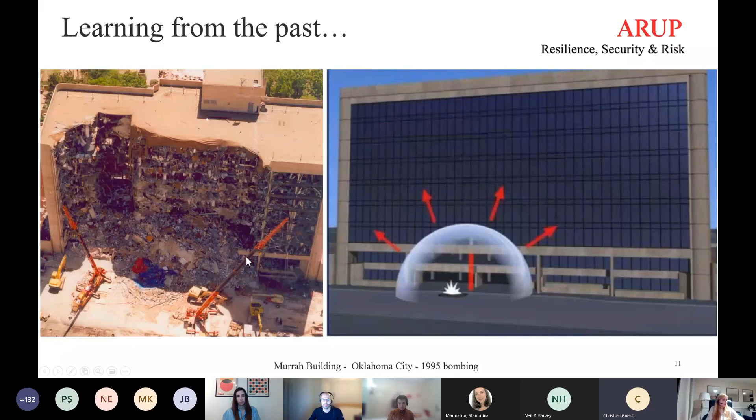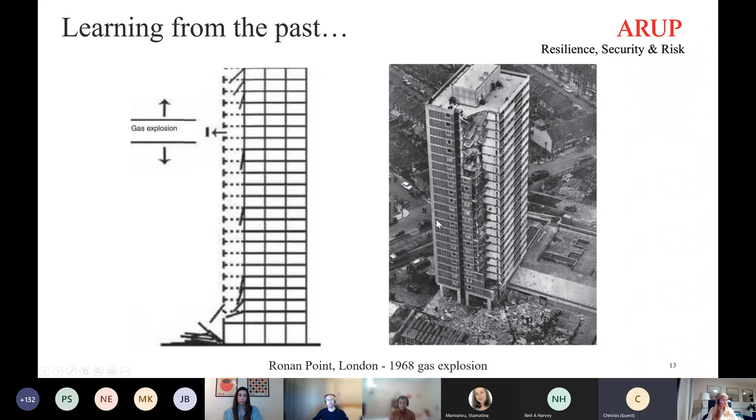Talking more about the present, there are levels of threat in the UK. Precisely, we have 5 levels: low, moderate, substantial, severe, and critical. This data is public, so you can find it on gov.uk. At the moment, substantial is the level the UK has, which means an attack is likely.

Another thing to note is that in the examples I've shown so far, I've just shown detonation of bombs apart from the aircraft impact. But in reality there are different types of threats. To mention another one, vehicle as a weapon has become very popular, more frequent. Eirini, my colleague, will discuss more about this specific type of threat and the possible mitigation options we can use to reduce this risk.

Coming back to the original question, why do we need protected design against terrorist threat? Definitely because of what we learned from the past, as I've shown you. But also because it can bring commercial advantages, since people couldn't come back to operations straight away after these events. And because it's perceived as the responsible thing to do, as we want to protect people and protect business. Finally, because it might protect against potential litigation.

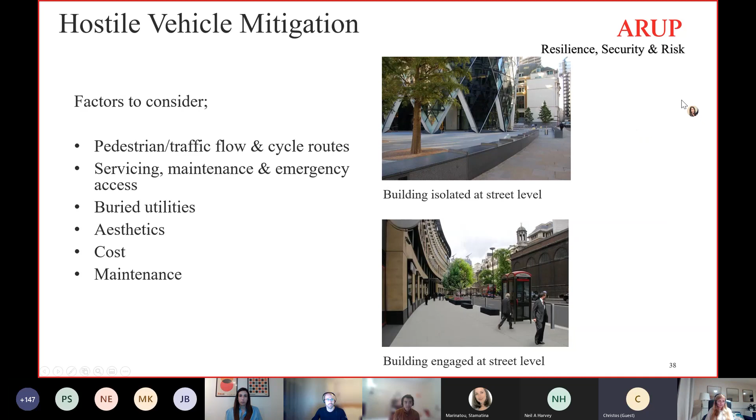Okay, so in this example, vehicle weapon attack was identified as a credible threat. However, due to some restrictions that we had from the highway authority and the landlord, it was not possible to install measures on the pavement along one of the building elevations. So our client expressed an interest in embedding the HVM into the facade of the building.

So we designed an upstand reinforced concrete wall that is in line with the building line, so it's part of the building facade. As we're looking at a high level of protection, aiming at no penetration, minimum damage, and we're looking to achieve a specific rating based on CPNI guidance, we also conducted impact testing to ensure it complies and matches the client's requirements.

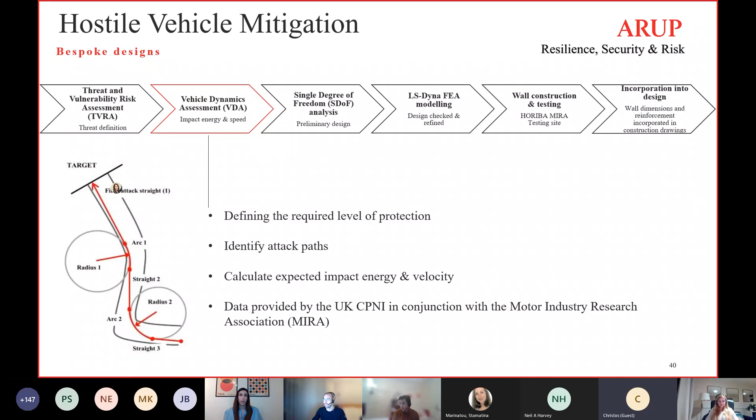So after the threat was identified, and that's a common process we follow, we undertook a vehicle dynamics assessment. What we do is identify possible attack paths like the ones you see here, and calculate the expected impact angle, speed, and impact energy for different vehicle types and trajectories. And that sets the design basis.

So during an impact, we know that the kinetic energy of the vehicle is converted into work. During a soft impact, the energy is dissipated by the structure - a vehicle hitting a bollard is a good example of that. While during hard impact, the structure is considered rigid and the energy is dissipated by the deformation of the vehicle, like in the case of a rigid wall or a planter.

In reality, it's a bit of both, but we conservatively assumed a hard impact to calculate an equivalent static impact force. Based on that force, we undertook a preliminary sizing and reinforcement design, and then moved on to evaluate its performance using a single degree of freedom dynamic analysis.

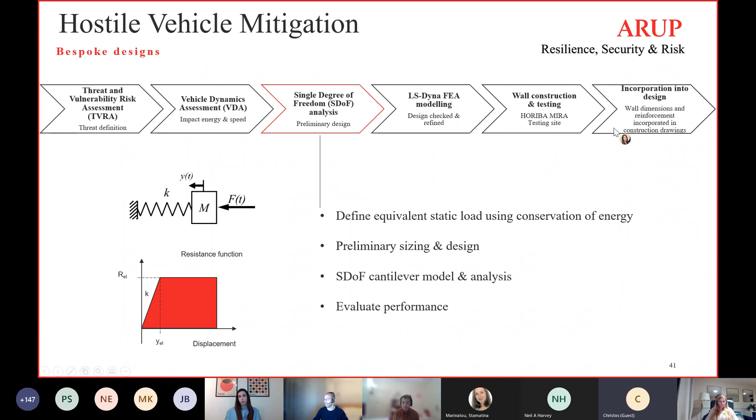Anqi will talk a bit more about single degree of freedom later, mostly about blast, but it's an efficient way of checking a design is within acceptable limits. So once we're happy with the preliminary design, we use finite elements to model the wall in LS-DYNA to check and refine the preliminary design.

So overall, the challenge here was that we had a large level difference between the ground level outside and the slab level inside, creating a large lever arm. And also the need to keep the wall as thin as possible to limit potential damage to the wall itself and not affect the existing slab.

So this step was important to provide us with confidence in the detailed design before moving on to testing. Again, here we conservatively used an impact force time history - this one you see here, recorded from a test of a vehicle impact to a rigid wall. So this is applied to the wall depending on the vehicle we have.

So a vehicle is stopped by engaging its chassis rails. So the impact force was applied to the wall at the height and area taken by the chassis rails.

As we know that this was a conservative approach, we also used a modeled vehicle to do the analysis. So we knew that the specific one was a bit less stiff than the one we were going to use during the test. So these worked as an upper and lower bound for our analysis.

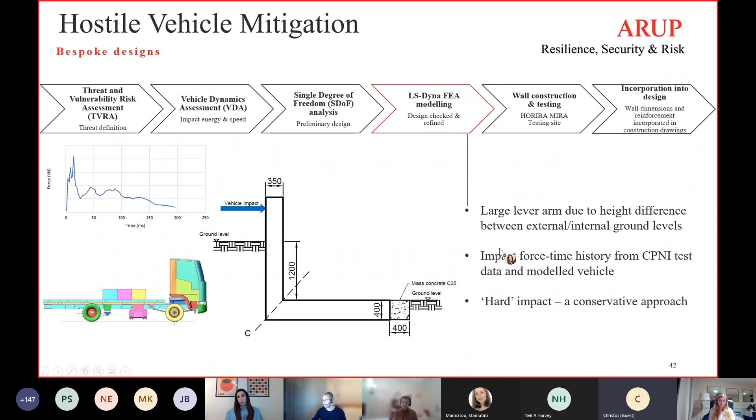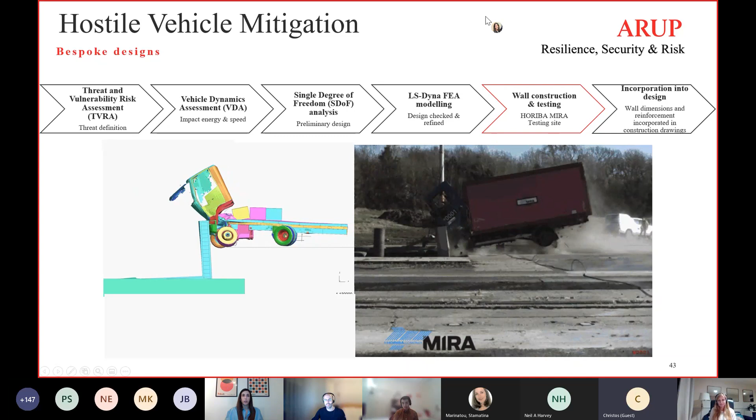The good thing that comes out of this is that after doing a few of these, we have enough confidence to be a bit more creative and design measures using analysis. Obviously, we don't always need to go down the test route - that was a client requirement. We are fairly confident in the analysis in order to go ahead with that. And that's all from me.

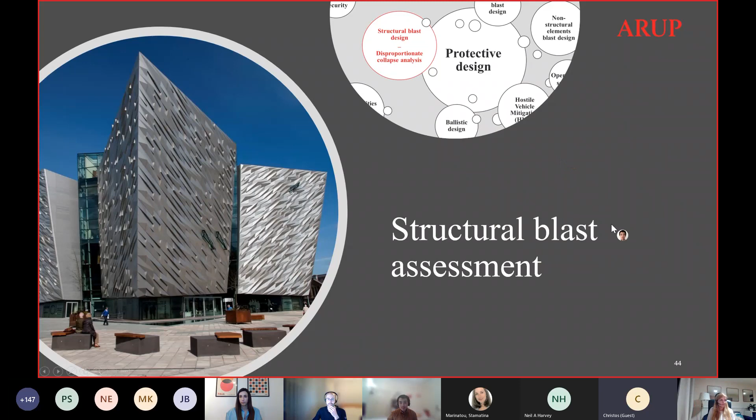This slide talks about what we do generally in the structural BLAST assessment. We typically start from a standard structural design, which is not designed for BLAST. Then, according to the TVRA report, we can identify the type of loads - the peak pressure and the duration. Once we can predict the BLAST load, we undertake a structural dynamic analysis to determine the response of the structural design subject to those BLAST loads.

If the response or performance of the structure - either a building or a single component - is satisfactory, meeting the design criteria, then we don't need to do anything. The standard structural design is adequate.

But if the design is not adequate, which means probably a primary structural component is deforming significantly and leading to possible collapse, or the entire building will collapse as a result of our analysis, then we will recommend hardening measures, and we will discuss those hardening measures with the structural designer and the stakeholder.

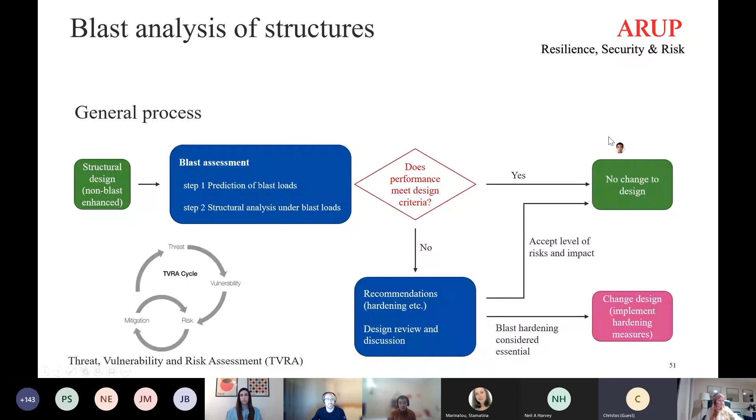What can we use to do our structural design against BLAST? We have many tools in our toolbox, some used for structural analysis and some for predicting BLAST loads. Generally, they can be divided into two groups.

The first group is what we call fast solving methods, such as the single degree of freedom method, and for predicting BLAST loads we usually have empirical methods such as ConWep, which are based on test data or simple engineering theories. They are very fast to run and very accurate and reliable for well-defined problems. We will talk about this in detail later.

At the other end of the spectrum, we have a group of tools we call physics-based methods, namely finite element methods or computational fluid dynamics. These are based on first principles, so they require a lot of computational resource to run the model - relatively expensive and requiring specialist knowledge to set up the model and interpret the results. Sometimes it also requires validation of the numerical model so that we can trust the results.

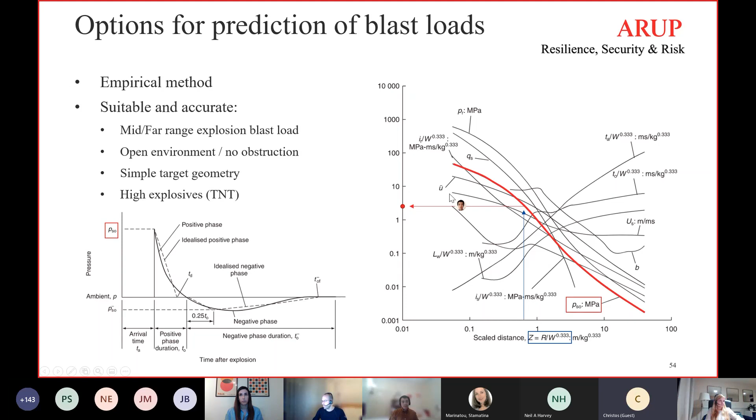Empirical methods are very useful and reliable for far range explosions in an open environment. But sometimes we have situations where the explosion takes place near or closer to the target, or in a complex environment with neighboring buildings that reflect the blast loads, or the explosion takes place inside a building, so confinement, channeling, or reflection effects cannot be considered by empirical methods. In those scenarios we should use computational fluid dynamics methods. These have in theory a wider range of applicability, but are quite expensive to use, so we only use them when we really have to.

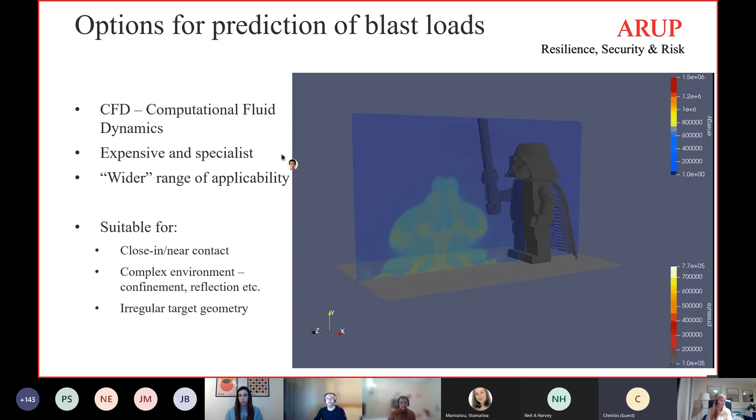Once we've predicted the blast load, the peak pressure, and the duration of the loads, it's time to do a structural dynamic analysis. One option is to use single degree of freedom methods. They are very useful for well-defined problems. Well-defined means, for example, a column subject to a far-field blast load.

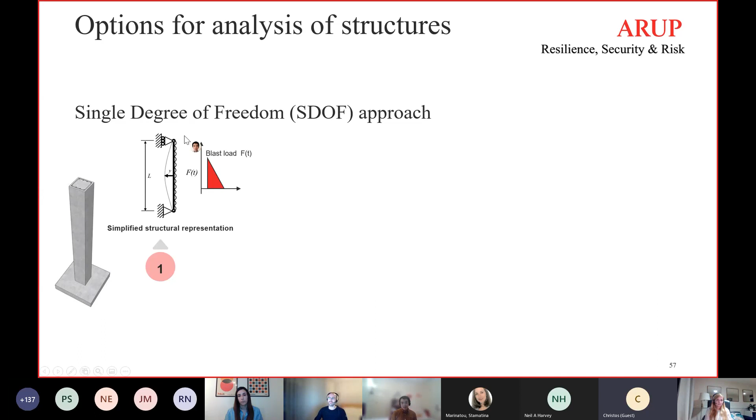Typically the column can be simplified as simply supported. Since the blast load is far-field, it can be assumed uniformly distributed along the span, and the column is expected to respond in flexural behavior. Once we have this simplified system, we can transfer it into a single degree of freedom model. By assembling the dynamic equilibrium equation of this model, we can solve it and calculate the maximum deformation, rotation, ductility, and the reaction at the supports. With these results, we can check the performance of the column and draw conclusions on the performance of the component.

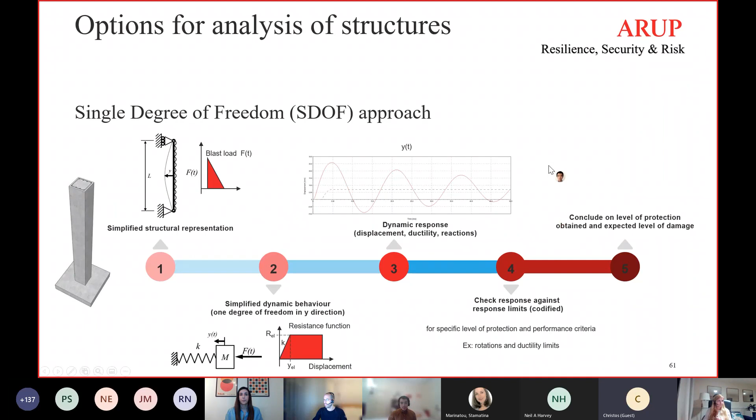In other cases, we study the response of a column subject to a close attack by an explosive device. If we want to check whether the column will collapse, we prefer to model it using solid elements, and then model the reinforcement and embed it into the solid elements as beam elements, so we can see the interaction and the response in more detail.

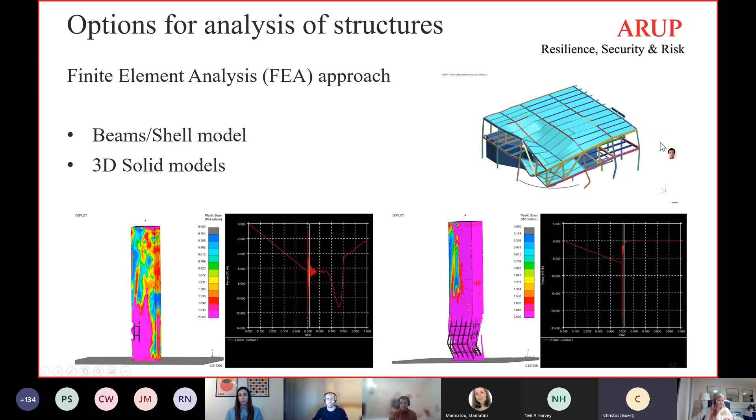This is another example, showing how we use a mixture of finite elements to study the response of an attack in the form of an explosive device placed on the floor.

Here we want to look at the detailed local damage of the concrete floor. We modeled the concrete floor using solid elements, and for the supporting structures like the beams and columns, since they are not directly under the blast load and not expected to be heavily damaged, we typically choose shell elements to model them. This helps reduce the computational demand and strike a balance between speed and accuracy.

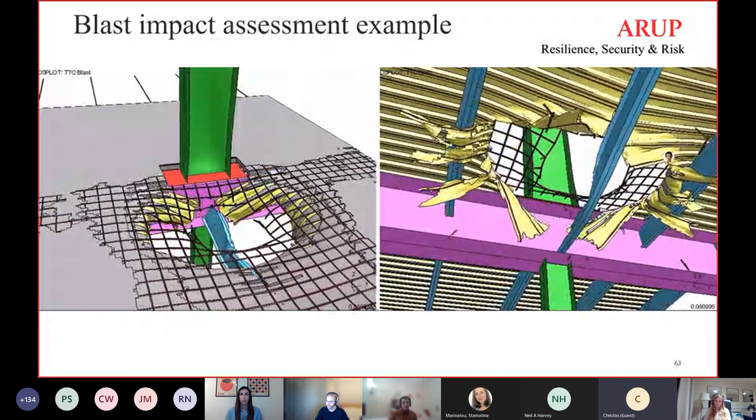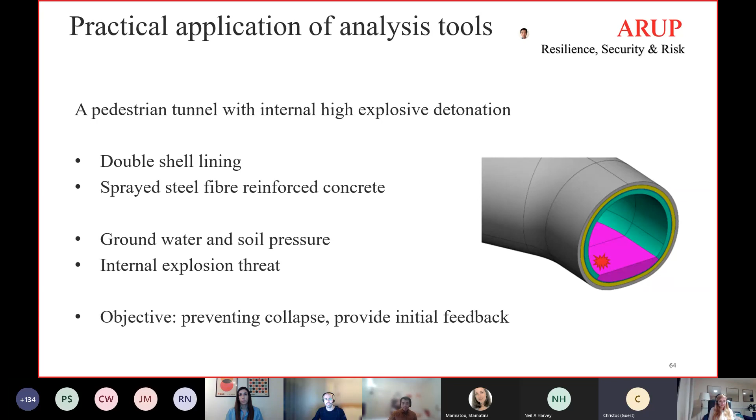First of all, what tools do we use to predict or calculate the internal loading on the tunnel? First, we have empirical methods, but they are usually suitable for far-field blast loads and also in the open environment. Here, within the tunnel is a confined space, and the charge is very close to the tunnel lining, and also due to the confinement, we have reflection as well. So it is best typically we will use CFD to model the explosion and the propagation of the blast wave and the loading on the internal surface of the tunnel structure.

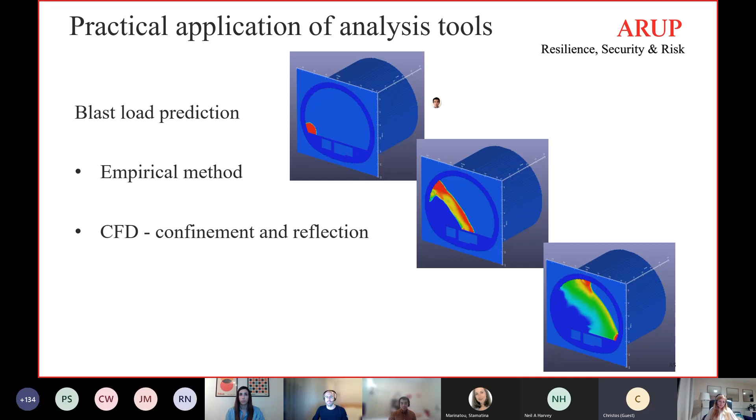Once we have determined the blast load, then we face a question of which tool do we use to analyze the response. As we have discussed before, a single degree of freedom model is suitable for a well-defined problem. Well-defined means we can expect or assume the structure's mode of response. But here, the structure is very complicated. Also, the explosion is very close to the lining, so we do not know what the dominant mode of response would be. So we choose a finite element method.

And in the finite element method, what type of elements do we use? We could use beam elements, and we also could use shell elements. And indeed, the static design of the tunnel was done by a shell element. But here, since we have a close-in explosion, we are looking at local damage, and also we are very interested in the through-thickness response of the tunnel lining. So we decide to go with solid elements. And another point of consideration is that this is at the concept stage, so we don't want to model a 3D detailed model. So we opted for a plane strain approach so that we can just check the most critical section of the tunnel under the highest blast load.

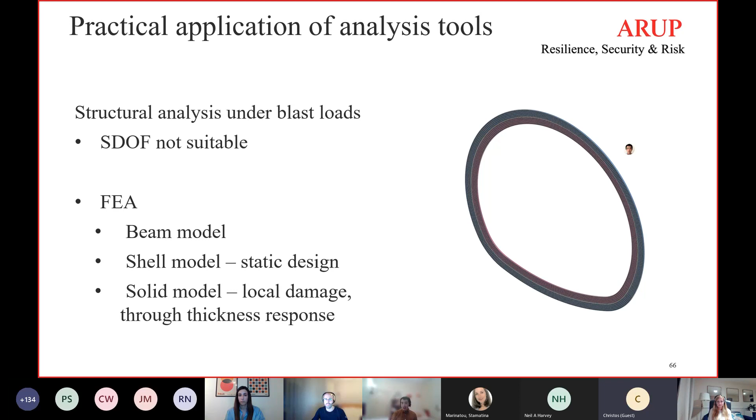Recall that we modeled this using a plane strain approach, which means if we translate this type of local damage into 3 dimensions, we can reasonably expect that the damage would be a mid-sized hole as a result of the internal explosion. And since we have these results, we went back to the tunnel designer and communicated these results so that they are confident with their initial design, such as the thickness of the lining and also the reinforcement in the concrete. So they can carry out further design and develop the design a bit further. And in the detailed design stage, we will come back to this problem and create the detailed 3D model to confirm the local damage and also show that the collapse can be prevented.

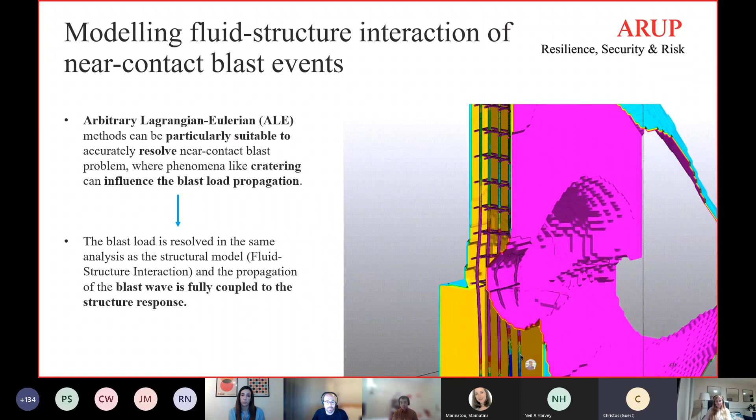So taking a step back, how is arbitrary Lagrange-Eulerian method different from what we are more commonly accustomed to as structural engineers? So Lagrangian methods, which are what we more commonly call finite element methods. Then we have Eulerian analysis, which is most commonly associated with computational fluid dynamic analysis. Then we have the arbitrary Lagrange-Eulerian simulation.

On the other hand, on computational fluid dynamic problems, we have a Eulerian formulation of the problem where the material is allowed to move across the mesh. Finally, we have arbitrary Lagrangian Eulerian model where the material can both move through the mesh in a fluid-like manner, similar to an Eulerian formulation, but also the mesh is allowed to translate and move through space.

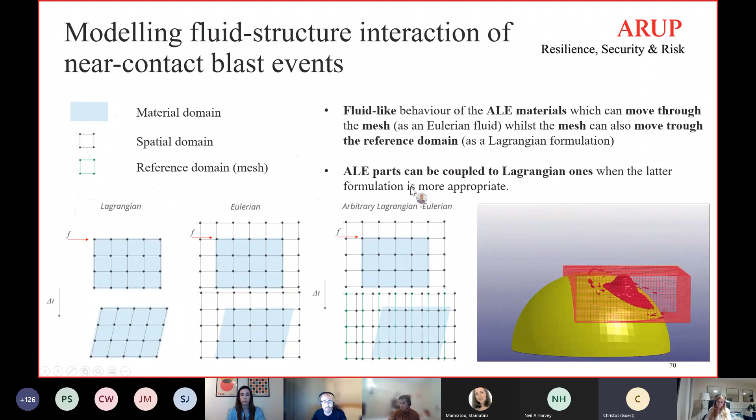So then, to summarize, what are the benefits of the ALE simulation? We talked about the main feature of being able to have in the same simulation both the blast load and also resolve the structural behavior. However, there are also a number of other benefits which are strictly related to modeling of blast phenomena.

That is, elements are removed from the analysis when exceeding a certain level of deformation, where anyway they wouldn't provide any strength to the simulation. Why? Because otherwise they would introduce numerical error and instabilities. On the other hand, on the ALE analysis, material can move throughout the mesh, so the problem of numerical instabilities induced by distorted mesh is avoided altogether.

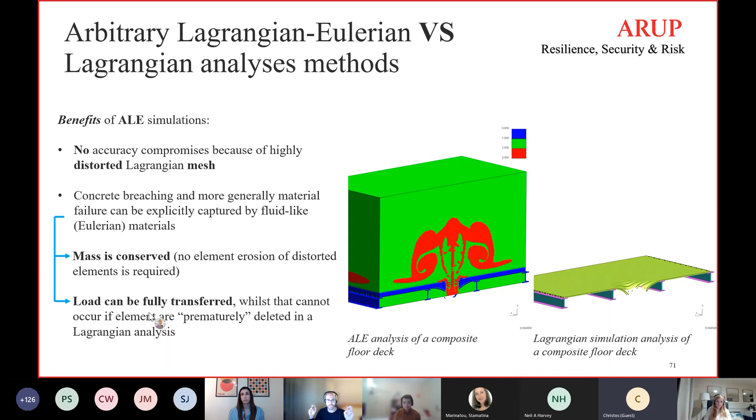So then, why don't we just use arbitrary Lagrangian Eulerian method or other more complex methods of this kind? Well, first, Lagrangian analyses are generally more expedient to set up and less computationally expensive. One other point, which is not least, is that ALE analyses are generally more prone to numerical instability, so they require special care and may require more iteration.

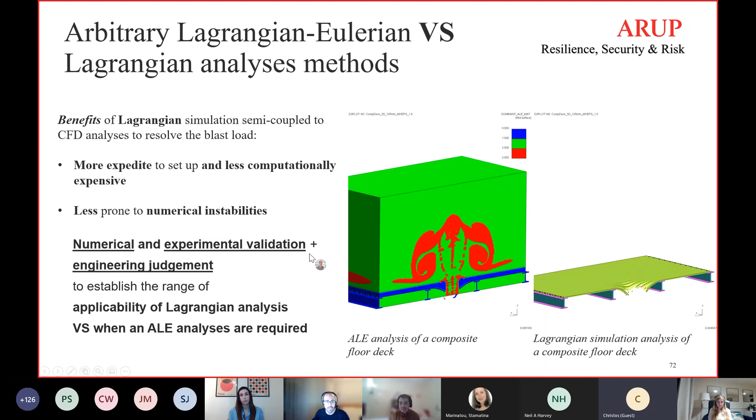So in general, how do we decide when ALE is required, or more generally more appropriate or suitable for the problem? At Arup we have carried out a series of numerical and experimental validations, comparing against literature but also simpler tests and results available from codes relevant to blast analysis. Based on this validation exercise, but also on our engineering judgment, we determine when fluid structure interaction, element deletion, or other items I've described are relevant, such that an ALE analysis would be more appropriate. So there's always room for the engineer to decide when one method is preferable with respect to the other.

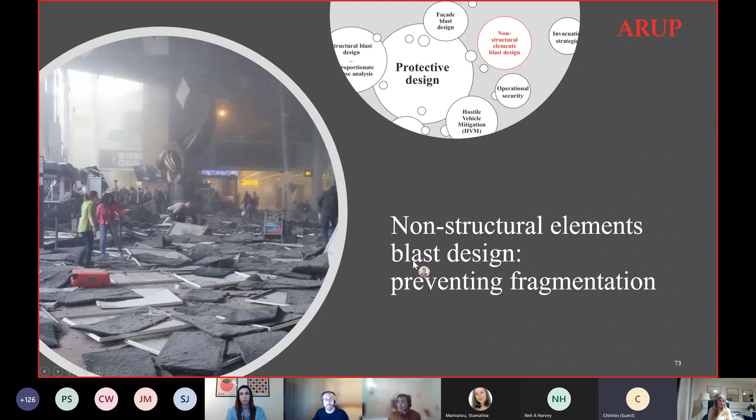Now talking about non-structural elements, as Eirini and Patrizia previously introduced, blast engineering is not only about structural elements but also about non-structural elements, which may be a significant threat over the course of, or after, a blast event. So before going into the detail of design for non-structural elements, it's worth addressing what the effects are and how we can classify effects on people following a blast event.

We have four different kinds of effects. First, we have the so-called primary effects. Consider the detonation of an improvised explosive device: there's a certain radius in the neighborhood of the detonation point where the blast wave would directly impact people and may lead to fatal injuries, with a higher likelihood of receiving fatal injury the closer to the detonation point. We call this radius the lethality radius.

More specifically, those injuries relate first to lung damage, but also to tympanic rupture or abdominal injuries. Whilst there's not much that can be done in terms of blast protective design within the lethality radius, outside that closer vicinity to the threat there may be other causes for injuries. Here we have secondary effects, which are non-structural elements or fragments projected at high speed against people because of the blast wave. Then we have tertiary effects, such as people being impacted against the structure, or quaternary effects such as burns, toxins, and asphyxiation. So as blast engineers, our focus when dealing with non-structural elements is mainly addressing secondary effects.

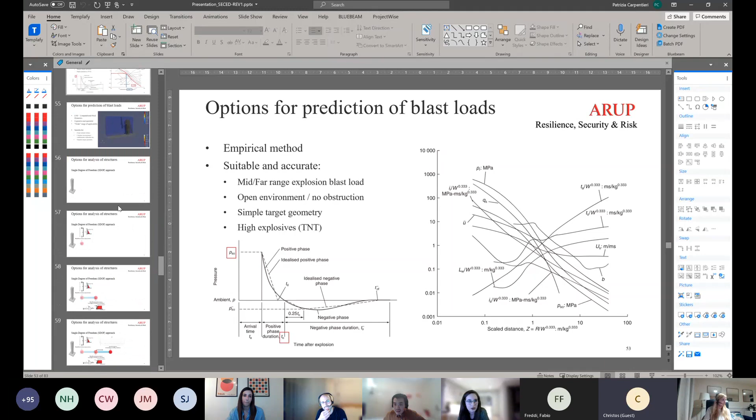Okay, and one last from me, if I'm allowed, probably for Eirini. You mentioned there was a very interesting physical testing with the bollard. What would be the cost of such a test, not in absolute numbers, but at least in relation to the design work, as a percentage perhaps?

Well, I can say that approximately it would be in the tens of thousands, not too high though, but it depends on what we're testing as well. If it involves building the structure like we did in this case, obviously the cost might increase a little bit. So it depends on construction costs as well, but it's quite a fixed fee for undertaking the test itself.

Perfect, thanks a lot for the response. I don't see any other questions in the chat, so I think it's time for me to thank again our speakers for delivering such detailed and insightful presentations for Young SECED tonight.